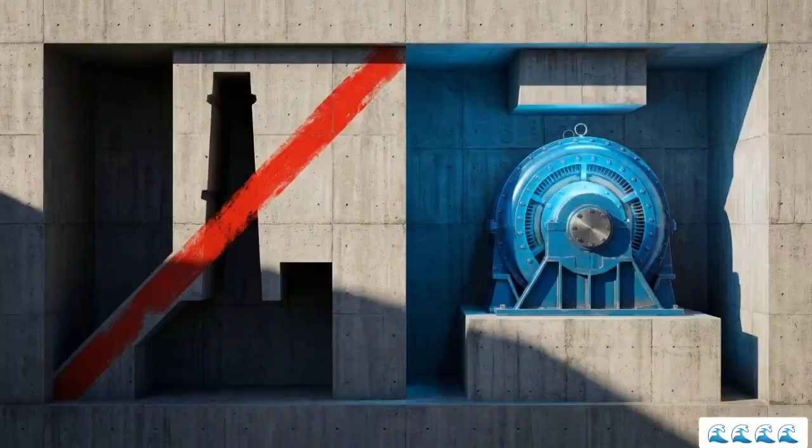In 2023, China generated 9.5 million gigawatt-hours of electricity. The country is executing a rapid shift away from imported fossil fuels, and sustaining its economy requires producing power on a scale unmatched anywhere else on the planet.

Over the past 2 decades, China's hydropower generation has surged from 222,000 gigawatt-hours to a staggering 1.3 million gigawatt-hours in 2023. The physics driving this output relies on a metric called head difference. In hydroelectric generation, the vertical drop in altitude is the key parameter. The further the water falls, the more kinetic energy it transfers to the turbines, allowing for massive electrical power generation.

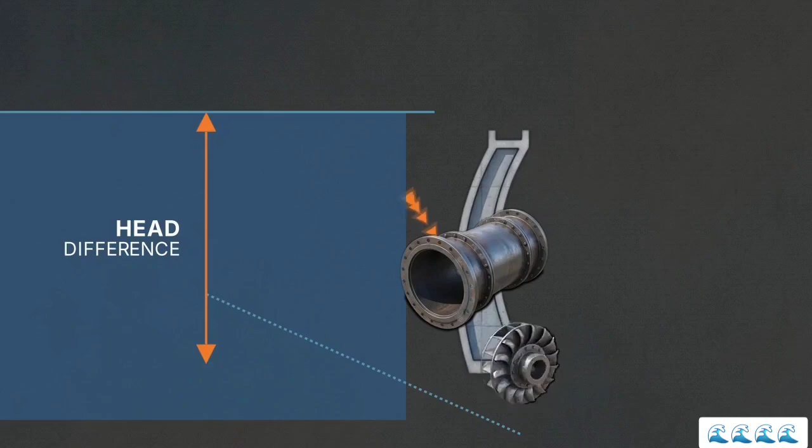To exploit this paradox, civil engineers must place the largest, most rigid concrete structures in the world deep into volatile, narrow mountain gorges. The western river systems, particularly along the Jinsha and Yalong rivers, feature some of the most severe altitude drops on Earth. The environment is incredibly hostile to heavy construction.

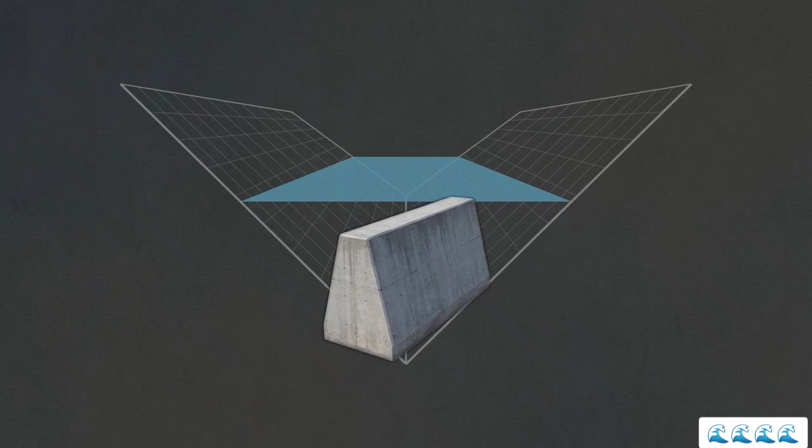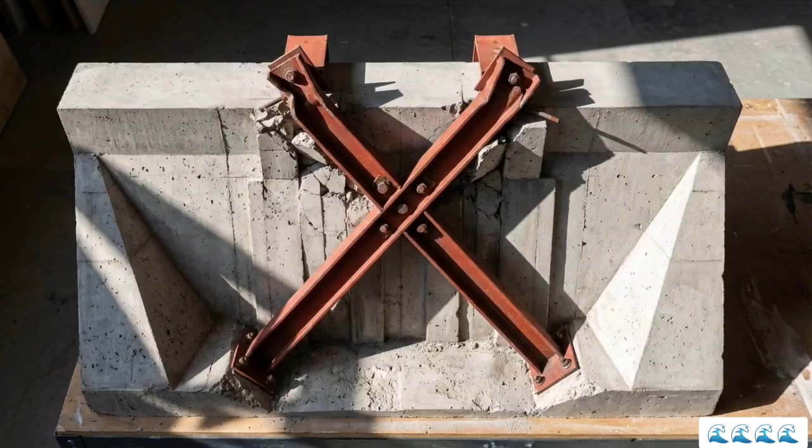This 3D wireframe shows what happens when you block one of those steep gorges to create an artificial high-altitude reservoir. You immediately generate exponential hydrostatic pressure, the raw physical weight of billions of liters of water pressing constantly against the barrier. The core structural vulnerability is forcing thousands of tons of rigid concrete to endure that immense localized pressure without catastrophic cracking. Solving this physical constraint required moving away from conventional designs.

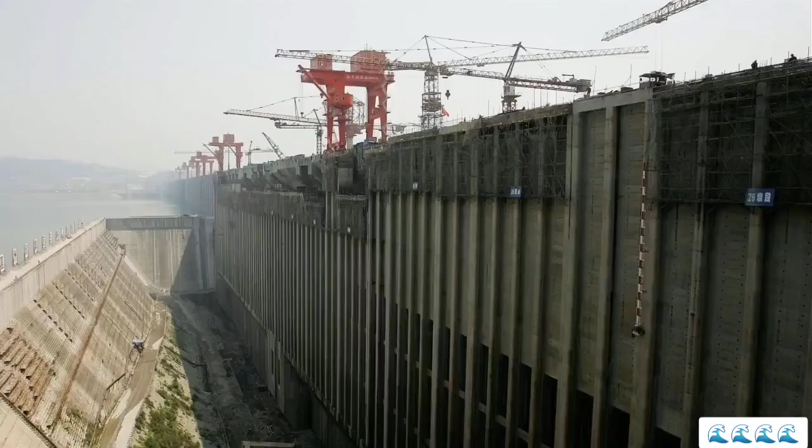Engineers had to pioneer complex double curvature geometries and deploy artificial intelligence to remove human error from the construction process. China's hydroelectric sector relies on a rigorous application of civil engineering to force concrete and bedrock to their physical limits. The Jinping 1 Dam on the Yalong River perfectly illustrates this geometry. Rising 305 meters, it is the tallest arch dam in the world.

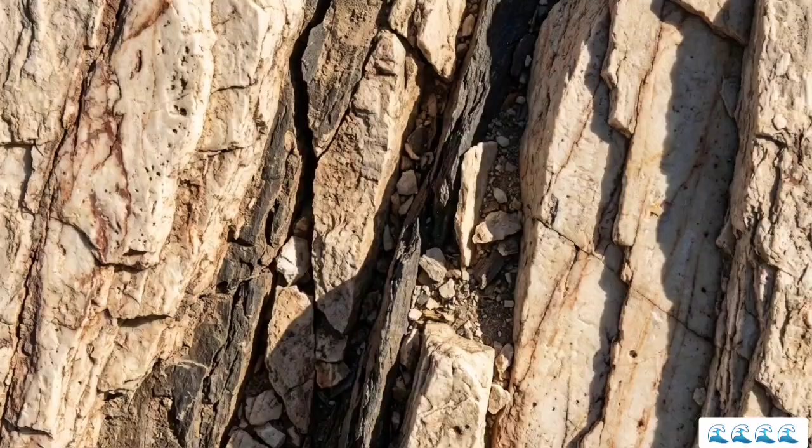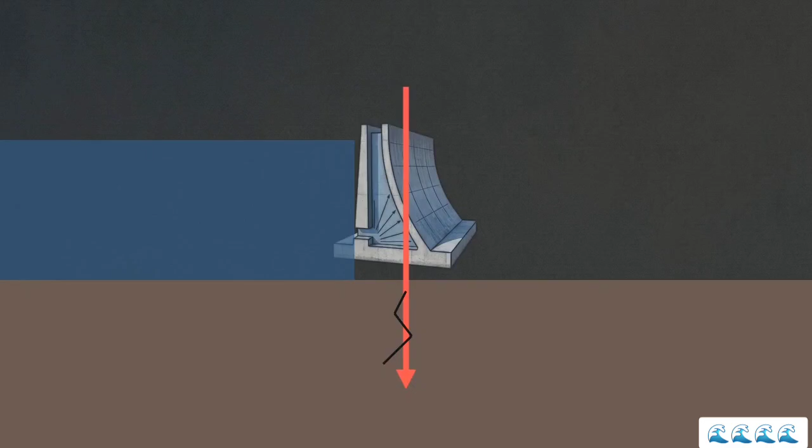The structure sits in a narrow valley with a highly weathered foundation. The underlying bedrock consists primarily of fractured marble and sandslate. This fragile bedrock profile makes a traditional gravity dam physically impossible. A gravity dam relies entirely on its own massive weight to hold back the water. This schematic demonstrates the mechanical solution. A precise arch design catches hydrostatic pressure, redirecting it horizontally into stronger valley abutments.

Because the left riverbank was too weathered, engineers poured a massive concrete cushion, a buffer layer distributing force vectors safely against the weak rock. They reinforced the lower foundation with high-strength concrete to manage compression, and wove complex steel reinforcement into the upper sections to ensure seismic stability. Jinping 1 proves that intelligent structural geometry can override inherent geological weaknesses, allowing engineers to safely harness extreme hydrostatic head differentials.

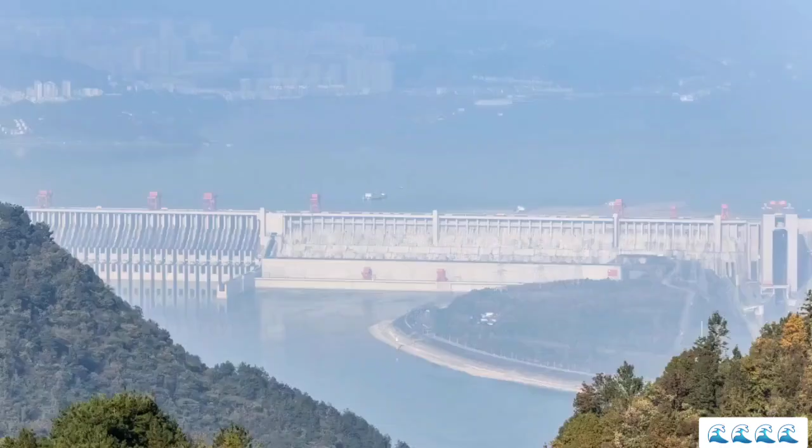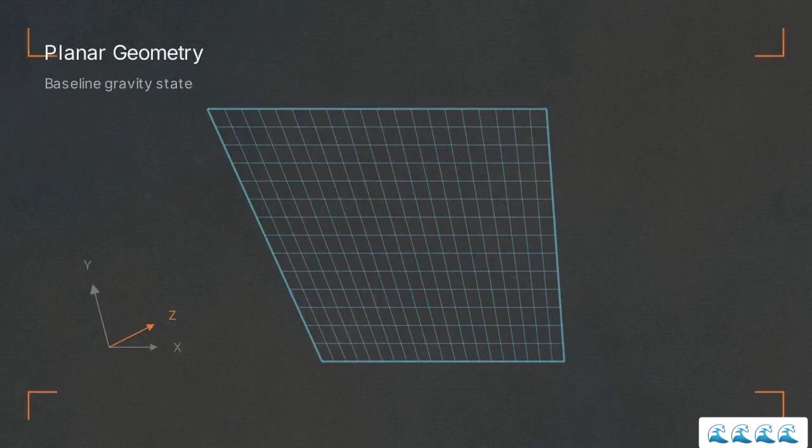Moving up the capacity scale, the Baihetan Dam on the Jinsha River generates an immense 16,000 megawatts of installed capacity. For context, only China's Three Gorges Dam has a higher output, possessing an unmatched 22,500 megawatt capacity and spanning 2.3 kilometers across the Yangtze River. Baihetan is unique because of its structural architecture. It's the world's largest arch dam to utilize a double curvature design, curving both horizontally and vertically to adapt to the gorge's deep constraints.

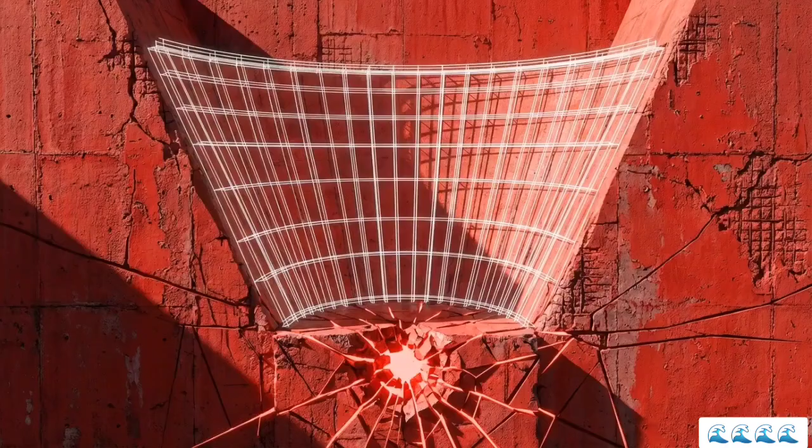Building a structure of this complexity introduces severe logistical friction. Executing a massive double curvature pour within a 4-year timeline creates high risks of thermal cracking. If the concrete sets at the wrong temperature, the entire structure is compromised. To solve this, AI systems completely managed the logistics. Algorithms autonomously handled cement mixing, routed delivery vehicles, and strictly regulated pouring temperatures without human intervention.

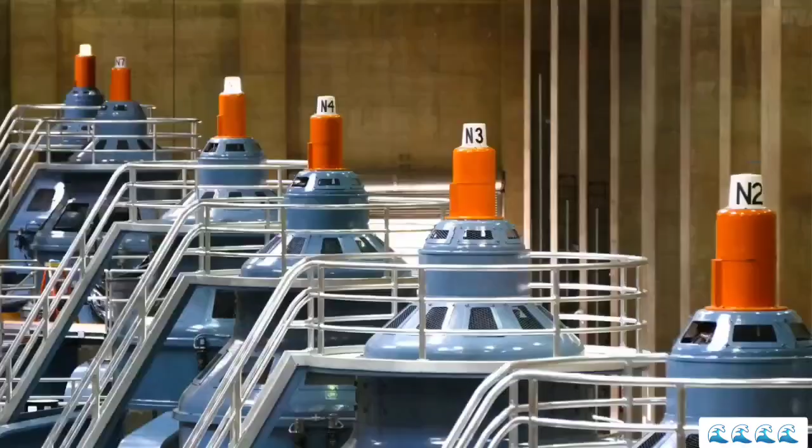The payoff was the interior real estate. Baihetan successfully housed 16 1-gigawatt hydroturbine generators, the first time turbines of that scale were successfully deployed anywhere. As hydroelectric facilities scale to multi-gigawatt outputs, their structural integrity relies exactly as much on autonomous algorithmic logistics as it does on raw materials.

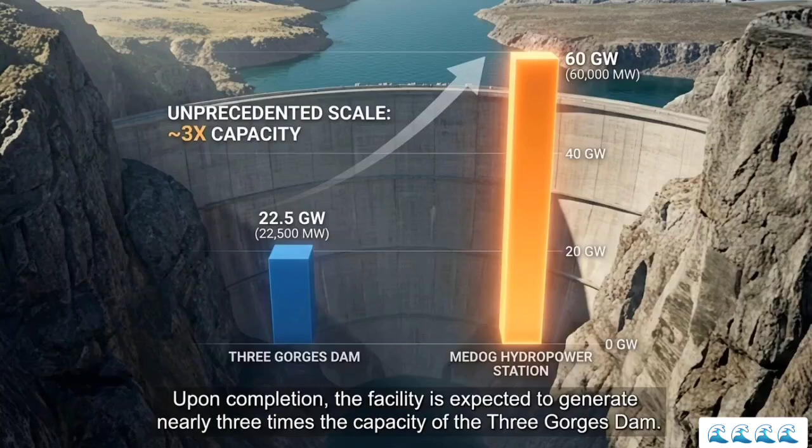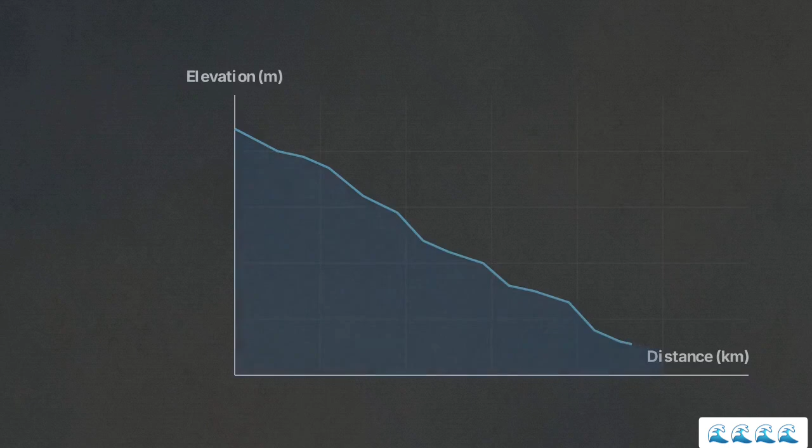The absolute frontier of topographical engineering lies further west, at the planned Medog hydropower station on the Yarlung Tsangpo River in Tibet. Upon completion, the facility is expected to generate nearly 3 times the capacity of the Three Gorges Dam. Rather than relying on a single massive concrete wall, the Medog project will utilize a cascade architecture, stepping the water down through a series of 5 separate dams. This elevation cross-section displays the topographical feature making that output possible, an extreme 2,000-meter drop compressed over just a 50-kilometer stretch of river.

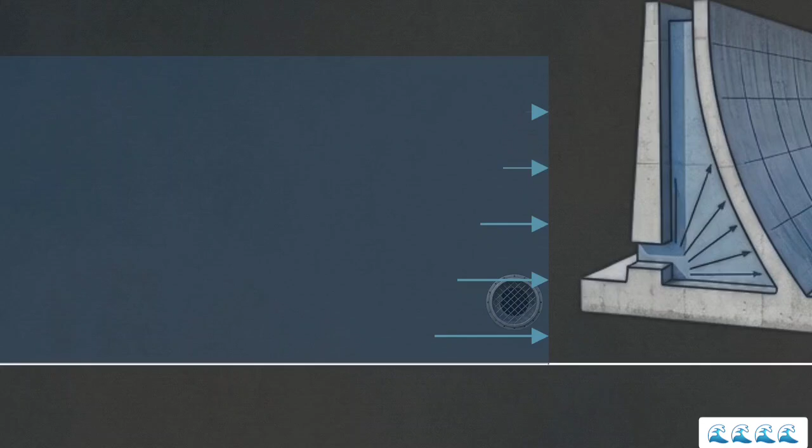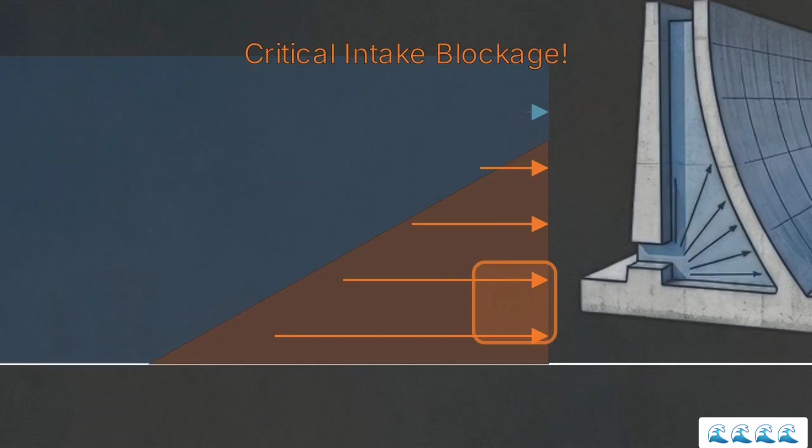However, damming steep western rivers exposes a critical technical flaw, the severe disruption of natural sediment morphology. Fast-flowing natural rivers constantly erode the surrounding landscape, transporting massive volumes of silt, sand, and rock aggressively downstream. This reservoir cross-section shows the mechanics of siltation. When flow hits the dam, it loses kinetic energy, causing suspended sediment to drop and settle at the bottom. This buildup alters carefully calculated hydrostatic pressures, eventually rising to physically choke off the deep water turbine intakes. Harnessing extreme elevation drops forces engineers into a perpetual, unwinnable battle against the river's natural geological cycles.

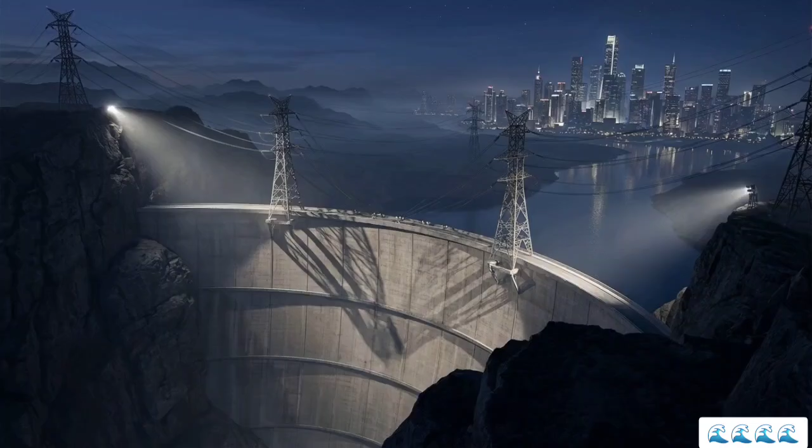Moving outside the mechanical structure of the dam, the operational demands of the electrical grid create an entirely different set of problems. To satisfy an energy-hungry economy, turbine operations cannot mirror natural weather patterns. They must run year-round in a continuous, uninterrupted manner. To guarantee steady output, operators must retain as much water as possible behind the dam, ensuring maximum head pressure at all times.

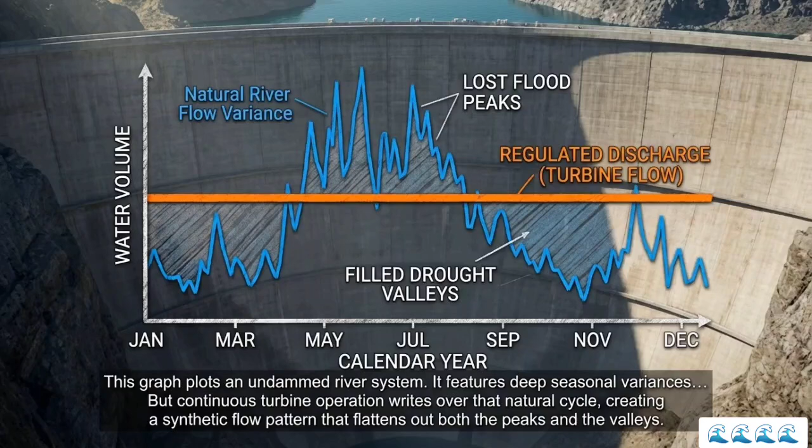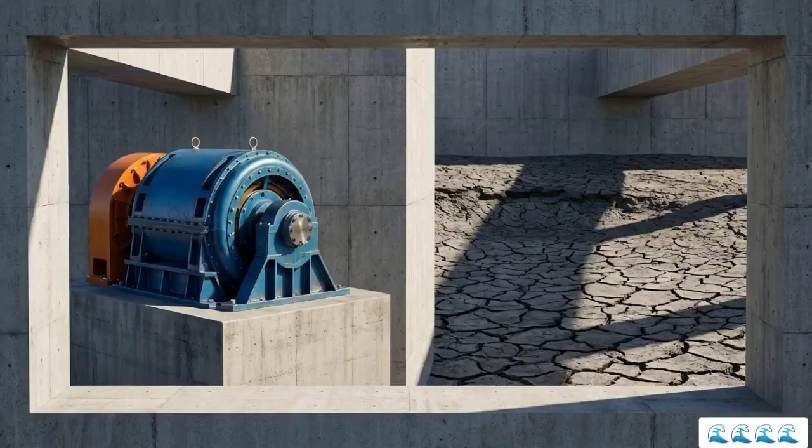This graph plots an undammed river system. It features deep seasonal variances, periods of low-flow droughts, followed by massive high-flow flood events. But continuous turbine operation writes over that natural cycle, creating a synthetic flow pattern that flattens out both the peaks and the valleys. The immediate environmental consequence is downstream starvation. Floodplains are permanently denied the high-water flood events required to naturally irrigate agricultural lands. Achieving perfect mechanical efficiency inside the turbine inherently demands the destruction of the natural hydrological cycle outside of it.

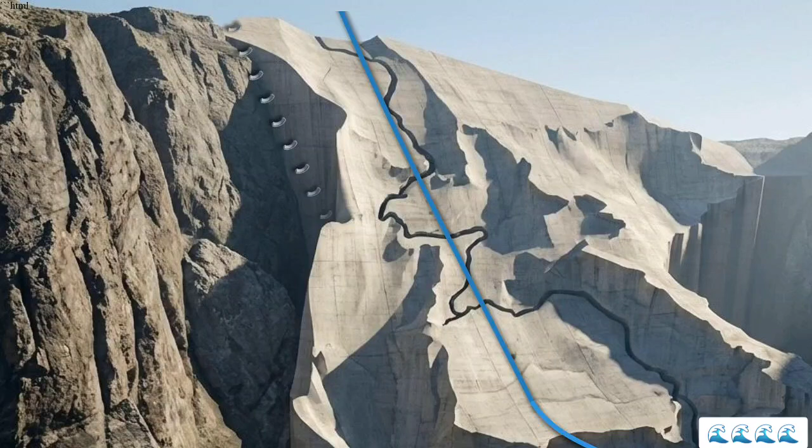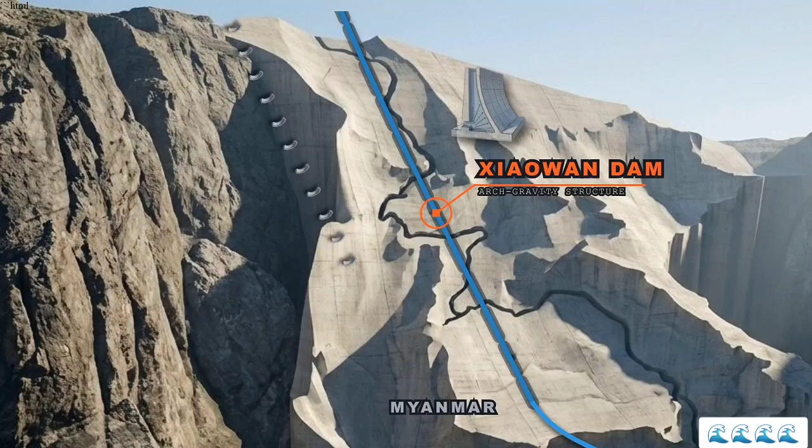This map traces the upper reaches of the Mekong River, projecting that localized flow regulation onto an international scale. 11 facilities, including the massive Xiaowan Dam, allow operators to dictate water levels flowing out of China into Thailand, Laos, Vietnam, and Cambodia. During regional droughts, Chinese reservoirs retain water to protect power generation, severely dropping the water and fish levels available downstream.